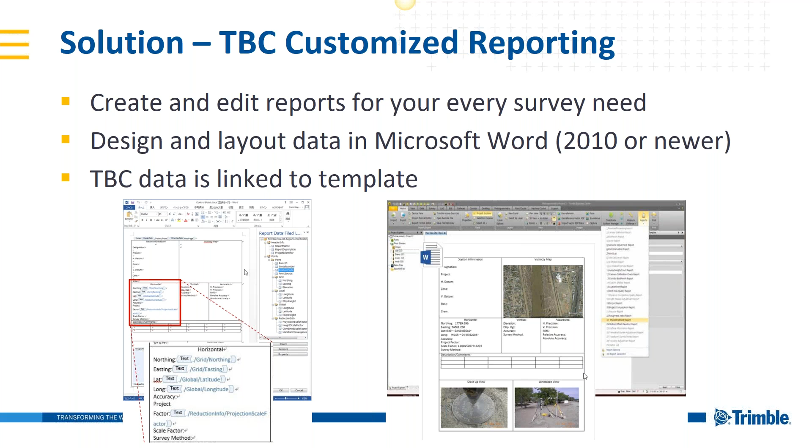It's very few and far between where I can find someone who's never used MS Word. Most schools, elementary and junior high, teach students to use these programs at a young age. So it's important that we can do this feature within a very familiar environment, to bring that ease of use.

So the workflow, I've got an image here, and I messed up the animation unfortunately. But what it's meant to show is you start the workflow: field workflow, you go out and do whatever it is you're doing, whether measuring a stockpile, collecting total station data, whatever it may be, as you normally would.

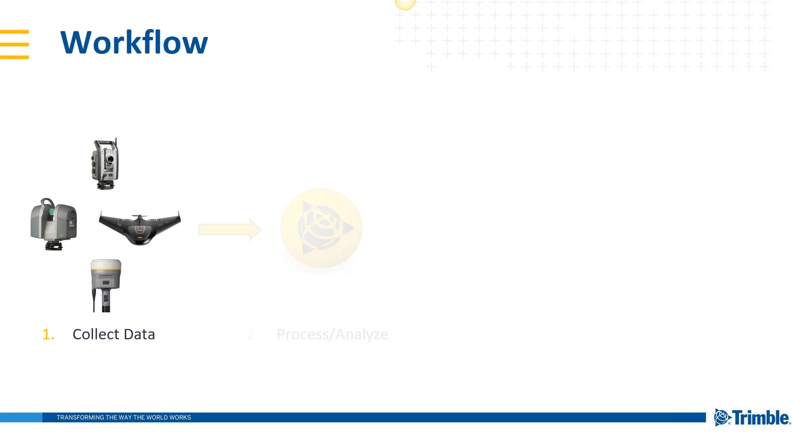You bring it into TBC as you normally would and perform that processing and QA workflow, maybe processing baselines, doing a network adjustment, things like that. Then from there, you use the Microsoft Word add-in to link the data in TBC to a Microsoft Word template document and generate your report. Pretty straightforward workflow, and Adam's going to demonstrate that soon here.

Some of the big benefits come down to the ability to document this data in your own unique way, as well as what your client requirements are. As survey professionals, we're always under what our client requires, and a lot of the time clients may want a report in a specific format. With the customized reporting, you're able to create that format and automate the data from TBC into a template. This also helps with standardization, streamlining the workflow instead of going back to that old way of copying and pasting data from TBC into a Word document just to get a report out. We want to get rid of that tedious process and make it more streamlined.

So, I talked long enough here. I want to relax. I should have brought shorts like Adam so I could hang out here, but I didn't.

That button there is new. For report name, here's where you get a chance to name your report. So I'm going to call this Adam's static baseline report. And then here's where you can add a description.

You can see under report options in case you're curious what this report is, so I'll just say custom report for baselines. And then here's the interesting part of this feature. For report source data, we have baseline processing data, network adjustment data, point list data, as-staked data, and alignment geometry data. What this basically is for our report is we want to be able to access certain types of data.

So for instance, with the baseline processing report source data, we have access to vector information, RMS, whether a vector is fixed or float. In a network adjustment report source data, we have access to error ellipses, standard deviations, and covariances and such like that.

The way I would look at it is, for example, the baseline processing report source data - any data that I see in the baseline processing report right now, I have access to. There's a few things that aren't included in the report, but essentially think of it as like a database for baseline processing. So Adam is linking to baseline processing or whatever it is - yeah, exactly, that's a good point. In a simple way, think of it as: if there's data you want to access in our current baseline processing report, you have access right here in the report data source, and you'll also have access to certain things related to baseline processing that you probably won't see in the baseline processing report.

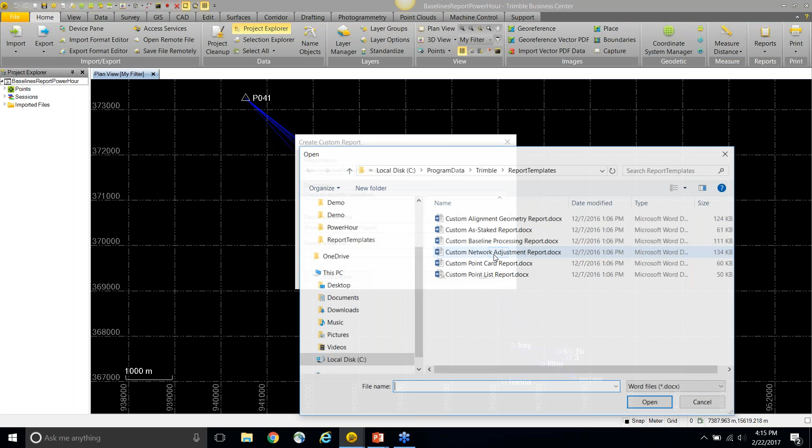So I'm just going to go ahead and click on the baseline processing report because I want to have access to vector information, GNSS information. And then here, my report layout file - this is where we get into the world of Microsoft, where we take advantage of a Word document. Here we have built-in report layouts that come with TBC when you install it, and each of these reports are the exact same reports that you currently see in TBC. But now that we have the custom reporting function, you have the power to grab one of these original templates and customize it to your liking - add things, remove things, and such like that.

Something to note is once you take one of these built-in report layouts and customize it, you're going to have to save it in a different location or give it a different name, because we wouldn't want the end users to tamper with the built-in templates. This was a note given by Jared Black, and I think it's really handy. So if you're going to use these templates, I'd suggest saving it as a different file name, put it in a different location so you can always revert back to these templates if you want to keep editing our current reports.

So if I'm starting out using this command, probably the best thing to do is use one of these reports right off the bat, use one of these custom ones that we provide, and then kind of learn how it looks. I think if you're going to start to get your feet wet with this function, this is the best place to start. Use the built-in custom reports that we already have, and then go ahead and edit it from there.

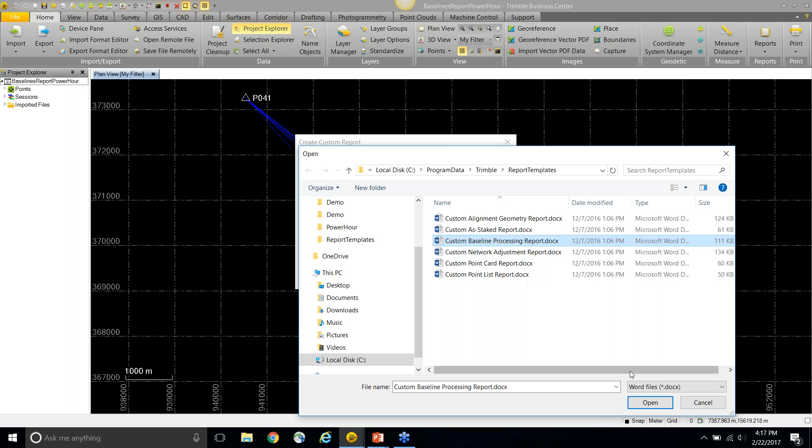What we're going to do here is briefly show how the report looks. We're not really going to get into customization now, we will really soon. So I'll go ahead and hit open, and now I have access to that layout. If I go to edit layout, this is just going to give you a sneak preview of the report. So here is our built-in report that we already have, and on the right you can see we have report source and layout control, and we'll get into more detail on that soon.

So this is just the exact same baseline report that you currently have in Trimble Business Center. What I'm going to do here is go ahead and hit save. And then automatically it's telling me to save as, since it is a built-in report for TBC. So what I'll do is place it under Documents, under the Power Hour folder, and call it Adam's Baseline Report, then hit save. And then your document will be upgraded to the newest file format. That is fine, I'll hit OK.

And there we go, it's a done deal. So I can go ahead and close it or hit OK, and now I am finished. Once I hit OK, my report is now going to be saved into Trimble Business Center, and it'll be saved indefinitely. So for instance, if I open a new TBC project, Adam's static baseline report is going to be available for me to use.

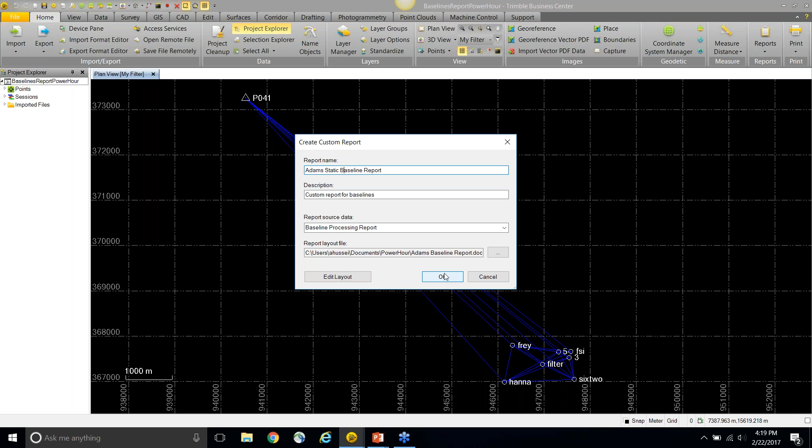I guess the only caveat to that, it's very important to know, as Adam said, if you open up TBC in the future you're still going to have Adam's static baseline report. But if you want to give that to another user, you need to provide that user with a VCT, or what we call a project template in TBC, and Adam can show you where you can save that as well. Exactly. All right, so I'll go ahead and hit OK.

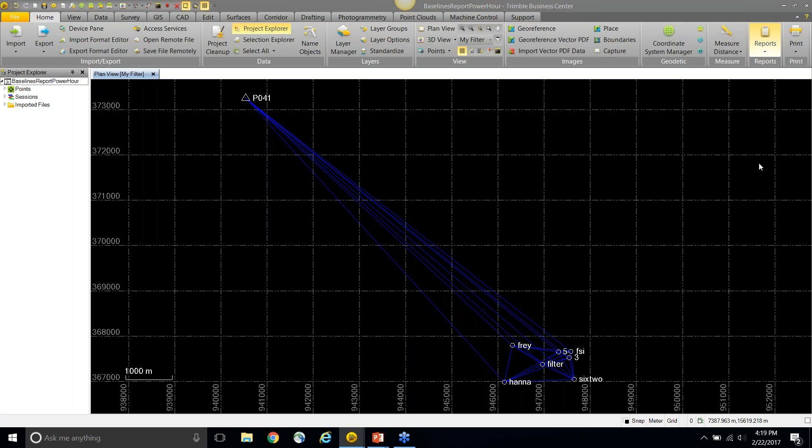All right, cool, and now I'm just going to try to access my report. So what I'll do is go back to the Home ribbon, Reports, and then go to More Reports. And if you look down the list, you'll see Adam's Static Baseline Report. So I'll go ahead and hit OK.

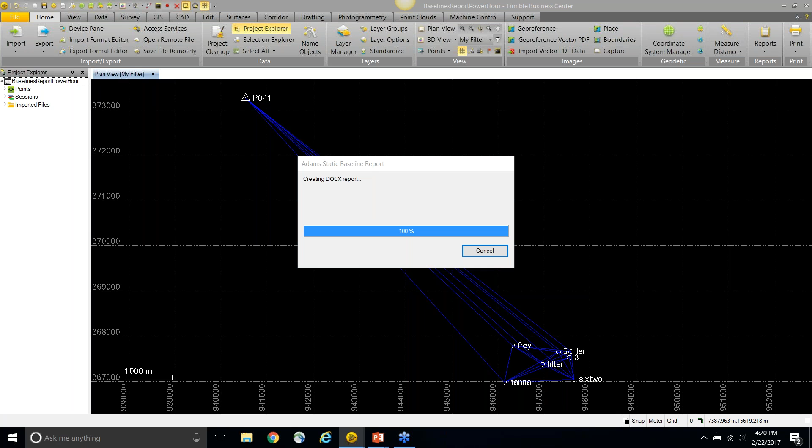And so now it's actually creating the report, right? Yep, it's creating the report, generating it I should say. Yeah, grabbing the vectors. So right now you don't have any data selected in your project? Yes, I do not. So if I wanted to only give a report for, let's say, 2 of those baselines, I would have to select the 2 baselines and then hit create that report again, and it would just show those 2 baselines? Yep, that is very true, and it is the same behavior that you have with our current reports in TBC. So when you select certain data, it's only going to show a report for that data. If nothing is selected, we're going to create a report for all the data that's in your project.

Nice, cool, all right cool. And then now we've got Microsoft Word opening. And here we go.

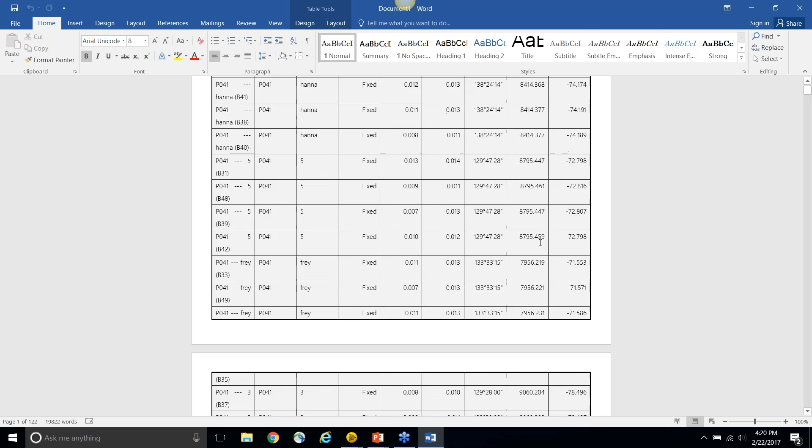And then I thought this was pretty cool. It shows the report name that I gave it, Adams Static Baseline Report. And this is just like our regular baseline report that we currently have in TBC, but now it's in Microsoft Word.

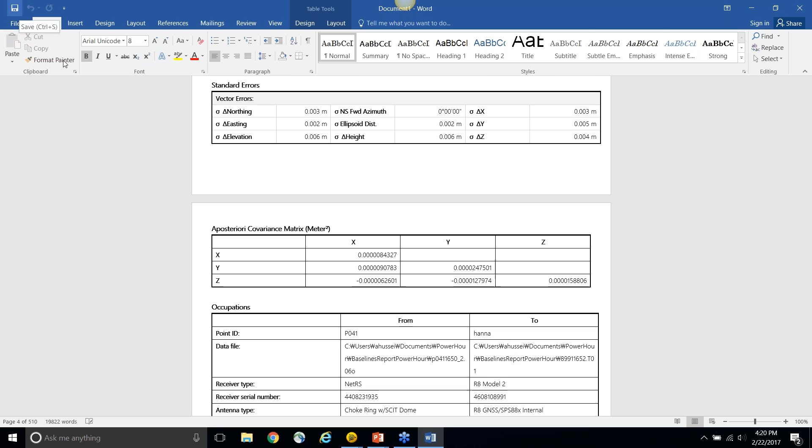Here's where you have the power to save it as a PDF or save it as a Word document, send that to somebody, and so on. At this point you're in the Microsoft world, so take advantage of the tools that are here. There's a very simple way of creating a report.

Notice here I didn't really get into any sort of customization, so let's get into that now. What I want to do is create a report layout from scratch, so I'm going to create a new Word document, set it up, and have my own custom report.

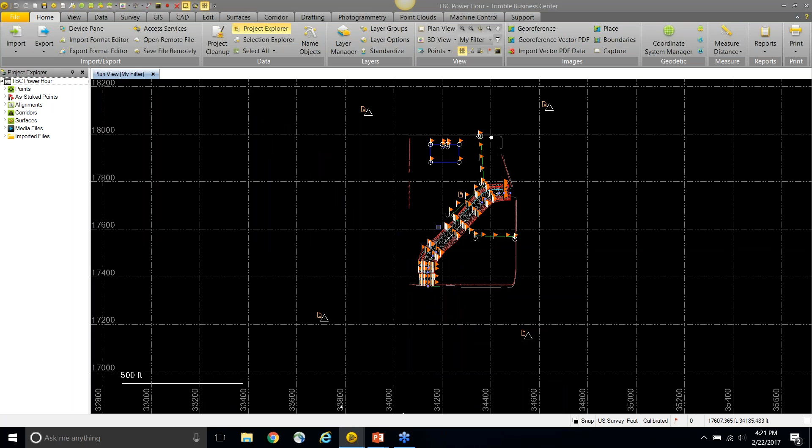I'm going to close this and open another TBC project that I have here. This project is a stakeout of a corridor, and it has stakeout points for building pads, a road, and an alignment. If you recognize this, it's also the same tutorial data set that we have in TBC regarding stakeout data.

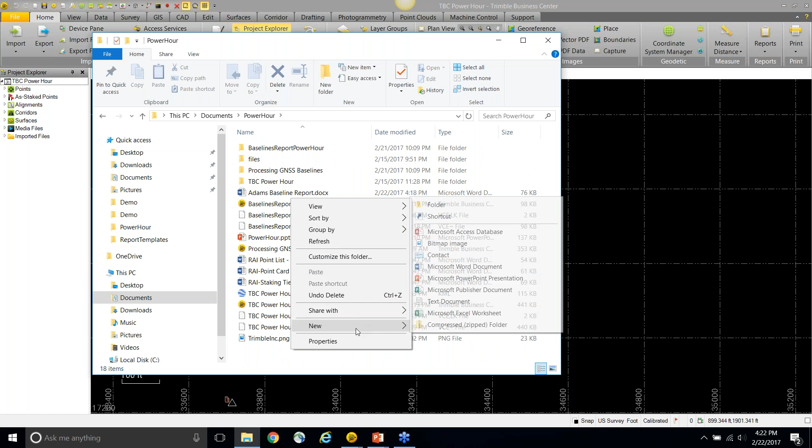So what I'm going to do is get started by creating my own custom layout via Microsoft Word. I'll open Windows Explorer, go to the location where I want to save my custom report layout, hit New, then hit new Word document, and call it Adams Stakeout Report.

So now I have a blank Microsoft Word document, so I'm in the world of Microsoft at this point, and I just want to create a layout for my report.

I want to call this one, I'll give it a title, and I'm going to call it Adams Stakeout Report. I'm going to build this report based on my client's needs, what I usually provide for my clients. So for me, I care about the office user who was using this project in the office, or who was messing around with the data in the office. I'll enter in the field user who is responsible for collecting the data.

When you're creating your layout, you should think about information that you know is in TBC that you want to show in this layout. Now what I'm going to do is insert a table, and I want to be able to see my stakeout points. What I'm interested in is the design name of my stakeout point, the name of my stakeout point, the delta northing, delta easting, and delta elevation.

So I'll go ahead and enter a table right here, and set it up myself — say a design name, stakeout name, and then the delta northing and easting.

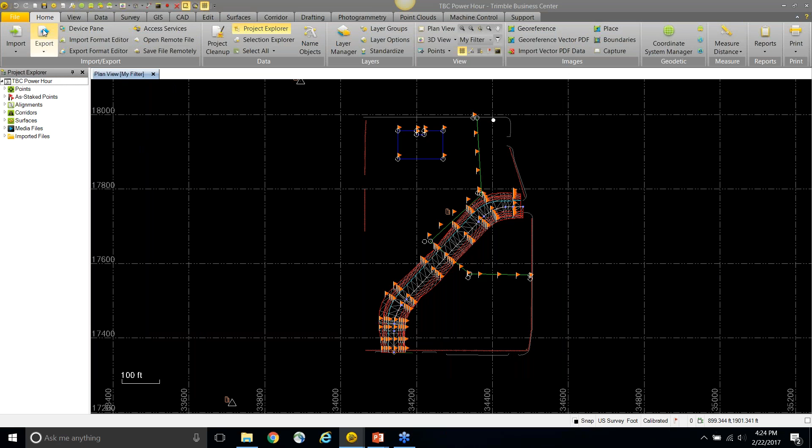Now we're going to do the exact same thing we did before to access custom reports. I'm going to go to Reports, then go to Create Custom Report, and now I'm going to call it Adams Stakeout Report. Then give it a quick description: Custom Stakeout Report Info.

And the data that I want to access is delta northings, delta eastings, the design names, stakeout names. So I wanted to go ahead and go into the As-Staked report.

Hey Adam, I have one question for you. You may have answered this earlier, but if you hit the Report Source Data tab again, there's 6 items there. Is there a reason there's only 6?

Yes, so we have 6 because when initially creating this feature, we wanted to select the 6 that are most popular. These are reports that are mostly used, so we wanted to make sure the end users had access to these types of data sources when creating their reports.

From what I understand, there are plans to add more data sources in the future, so that's something you'd want to keep an eye out for, based on user requirements. So like if a bunch of users want, let's say, a point derivation report, then as a TBC team we might work on implementing that as well.

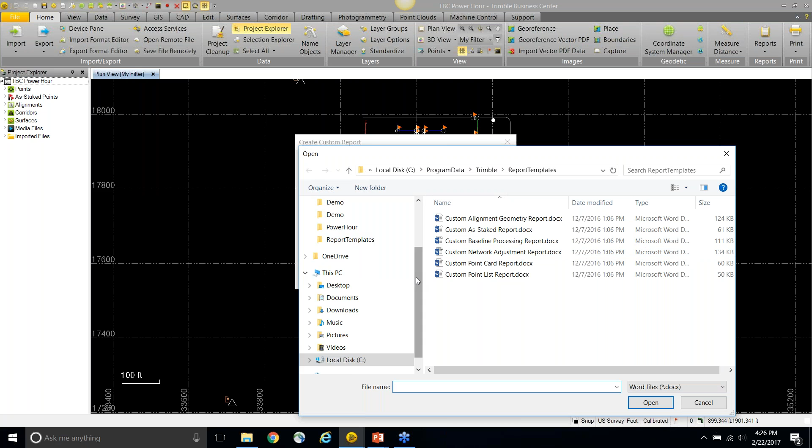Exactly. So go ahead and select As-Staked Report, and then from my report layout file, I'm gonna go ahead and grab the layout that I just created. Under here we are, Adams Stakeout Report, hit open, and now I'm ready to edit my layout and get it set up to create my own custom report.

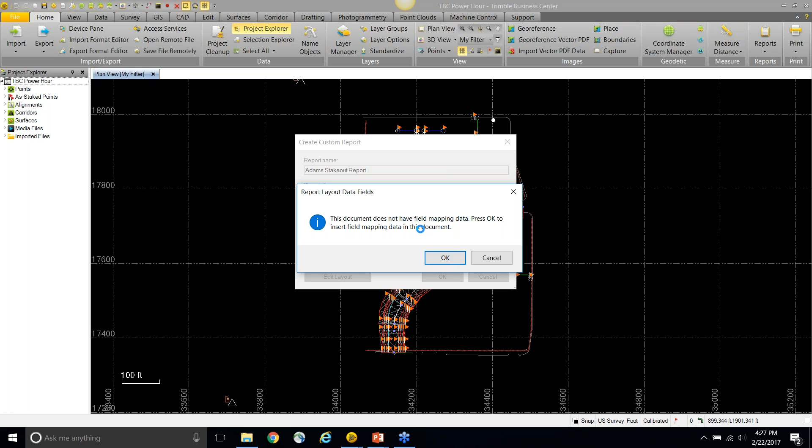And then here it's saying this document does not have field mapping data. Press OK to insert field mapping data in this document. So that basically means there is no data connected to this report. Do you want to do it? I'm gonna go ahead and hit OK.

And here we are, okay awesome. So here is the layout that I just created. And then if you look to the right, we have the data fields, and this is where we access all of the data that we want to put into our report. And on the bottom we have layout control, and here is where it gives us the power to really customize our report in a way to our own liking.

So for office user and field users, remember when I said you have to think about things that are already in Trimble Business Center that you have access to, that you can put on your report. So for office user and field user, that information is available in the project settings of your project. It shows the user information, it shows the field operator, and that's something you can set up in Trimble Business Center.

And here in the report layout data field, I have access to that under standard header info, and then here in user information. And right away I see field operator and computer operator. And what you can do to put that in your report is you would select the data that you want on your report.

You would drag it, and then go ahead and release, and it'll be set up right there. And now you have access to the office user information from the project settings in your Trimble Business Center project. And then you could do the same thing with field operator and place that under field user.

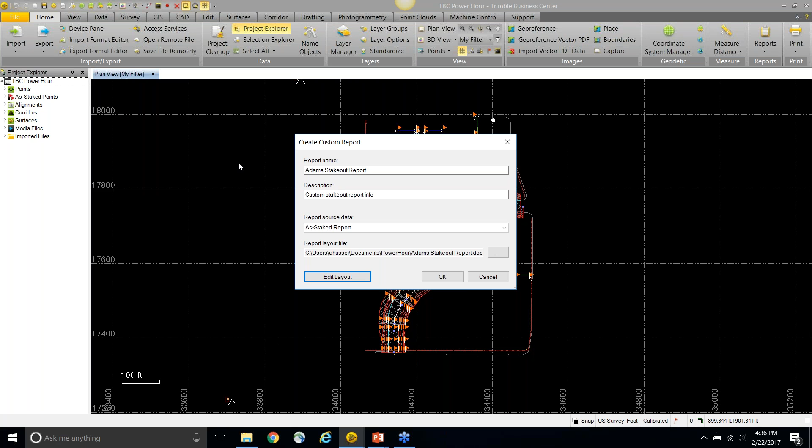I'll go ahead and hit OK, and now I have Adam's Stakeout Report built into Trimble Business Center that I can use repeatedly. And if I create a template, I can share it with other people.

Now I'm just going to go ahead and create my report. I'll go to Home, Reports, and then under More Reports, I'll go down, and I'll have access to Adam's Stakeout Report. Go ahead and hit OK.

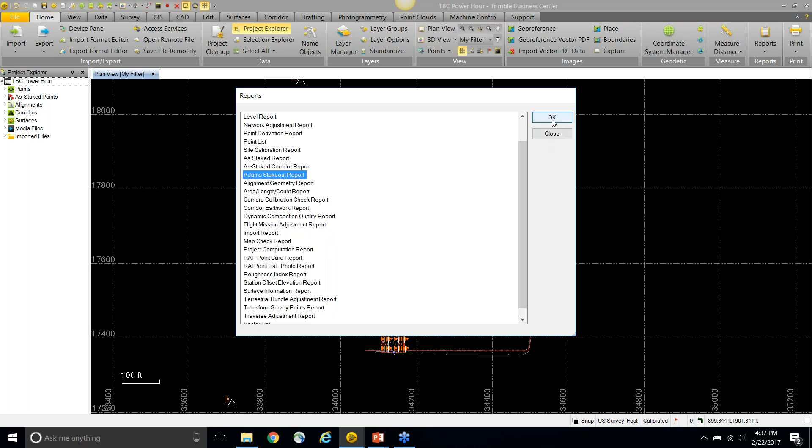All right, and then there it is. There's the report I just made, and it looks like it created my Stakeout Report really nicely. I can see the office user, which is set up in my project settings, field user, and then all my stakeout points that I have here.

And just like the original stakeout report that we have in Trimble Business Center, if a stakeout point is flagged, it'll show it in red in the original report. It also shows that here too in our custom reports as well. So that's like if the project settings had a tolerance set for the stakeout points, it would flag it in the project.

That also flags it here as well? Yes, exactly. It does that in our built-in reports as well, so we're keeping that capability in the custom reports as well. I see, yeah, cool.

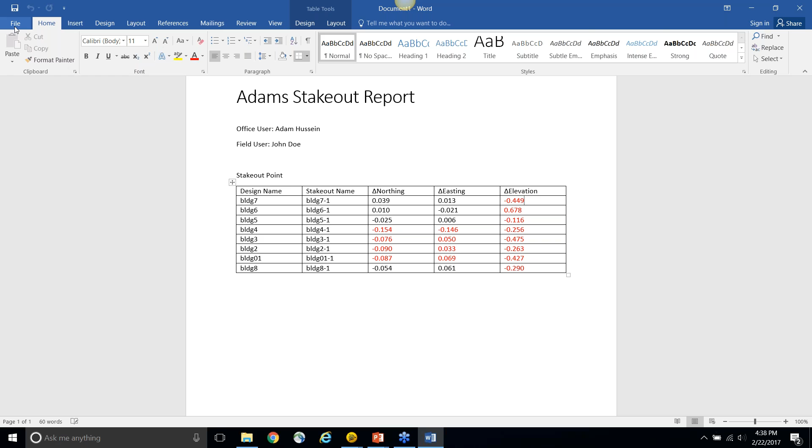At this point, you're in Microsoft Word, so I would recommend saving it. And then you could always save it as a PDF as well, or any other file format.

So there were some good questions asked so far I'd like to address. Holly asked, is there no way to share custom reports with someone who already has a company standard VCE? For those of you who don't know, VCE is the TBC project file format. Whenever you save a TBC project, it saves a .vce file. So in answer to your question, Holly, there is a way.

Essentially what you have to do is take a document like Adam has here, his Adam's Stakeout Report, with that field mapping data already, and if the user who already has a company standard VCT has a template, they can bring the template into TBC and create their report as Adam has done here, where it adds it into the more reports options, and then just save that again as a VCT. Maybe Adam, you can show how a user would save a VCT.

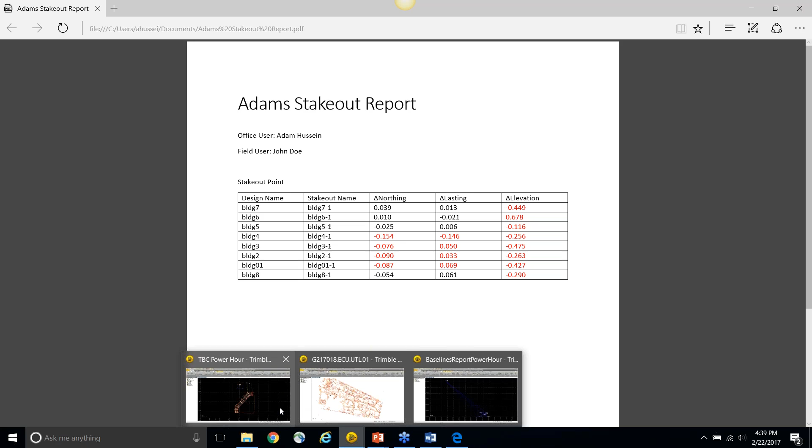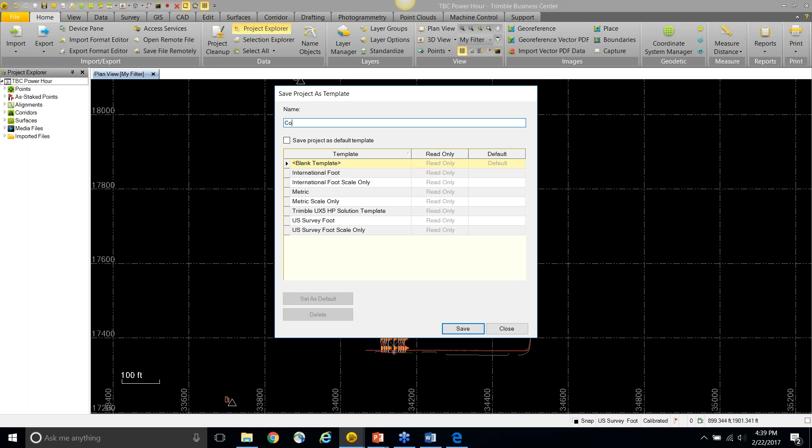So say for instance this is going to be a corridor that our users are going to constantly be working on. There's going to be work on here, so we want to save this as a template. You would just go to File, then Save Project as a Template, and here is where you would set up your VCT. So I'll call it corridor job, and then go ahead and hit save.

All right, so now I have a VCT set up. So anytime I create a new project, we have our built-in templates, which is metric, US survey foot, and now corridor job. So when I use that and create a new project with corridor job, that corridor is always going to be there where we can add in work and take away work.

And that's very useful, like if you have other things you want to set up in your project as well, not just reports, but things like your project settings or your certain tolerances for computations. So the custom reporting does apply to this VCT as well.

So another question, first Holly, let me know if that answered your question. Moving on, Grant asked what version of TBC has the create custom reports included. It was introduced in TBC version 3.80, so any version from that going up. We're currently on version 3.81, so it will be included in that version as well.

As well, that brings up another point. This feature is licensed to TBC Advanced, so if you are looking at using the customized reporting, you can access that through the TBC Advanced edition. If you aren't aware of the TBC editions and modules, I suggest you reach out to your local Trimble distribution partner, and they can definitely help you get into a specific edition or module suited to your types of workflows.

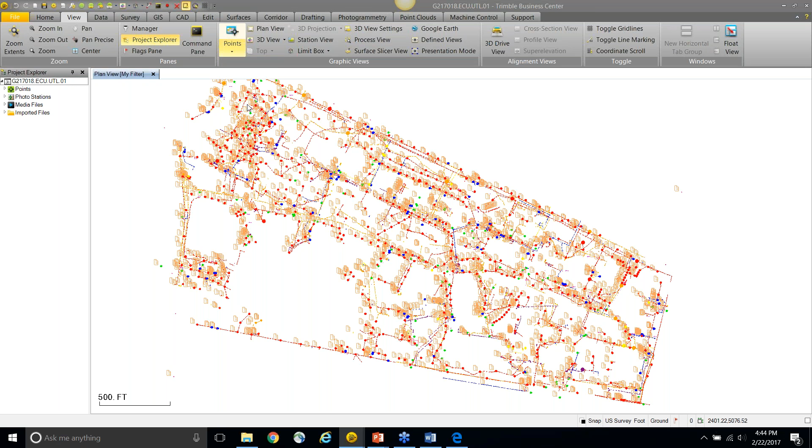And then this function, I think it's a pretty handy function. It helps us separate all of our data based off of the feature that's provided for each observation.

A little more background on this - Jared presented this morning on this, and it was a university site that they surveyed, and they do a lot of asset management. So there's a lot of utilities, a lot of infrastructure data measured here, like Adam's showing you with the feature spreadsheet, things like that.

So let's get more specific and try to tackle something he has here. Say, for instance, I'm interested in power meters. All right, so here is all the info, all of our data for power meters, point IDs, and more. Like we explained before, based on the data you select, you'll be able to create reports from that.

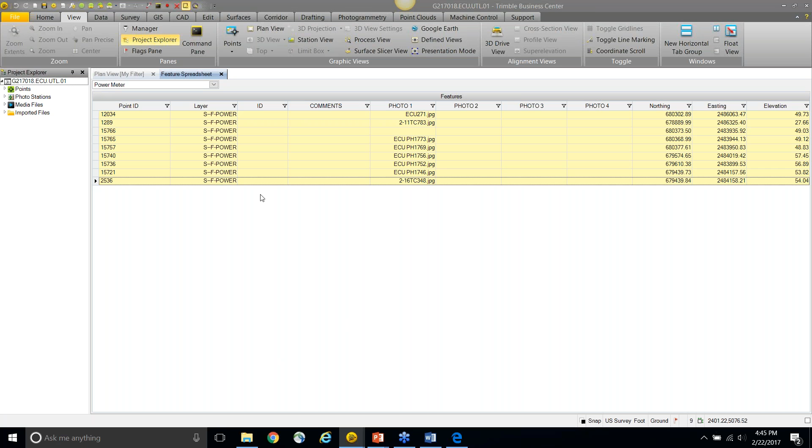So now I'm going to access one of Jared's custom templates that he created himself. I'll go to the Home tab, go to Reports, then More Reports, and go to the RAI Point List Photo Report. This report is just a simple point list report, and he customized it himself to his own liking. So I'll go ahead and hit OK.

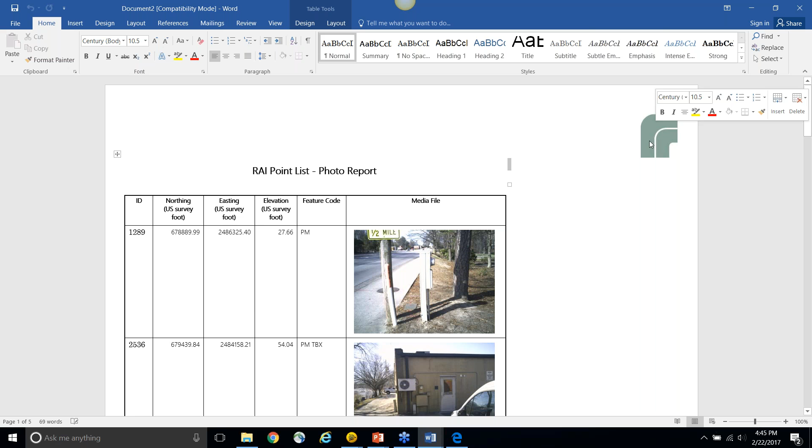And then again, Microsoft Word opens, and here is the report. So there's the logo in the top right here, you can see. And then here, it's a point list report where you have your ID, northing, easting, elevation, feature code.

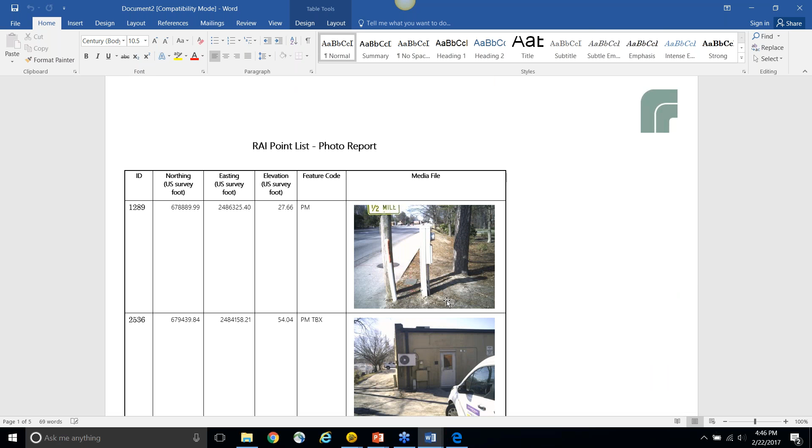What's really handy here, which I think really resonates with our end users, is the media images. This image was taken with a TSC3 or Yuma, where you can take a photo and attach it to your observation. Then we're able to see that media information in TBC, and we have access to the media data in the custom reports. I think this is really handy because everyone loves photos - no one likes to look at numbers all day.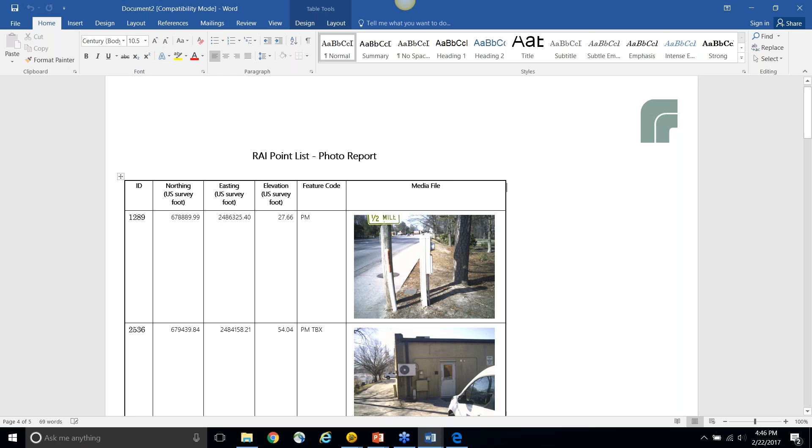Especially for asset management, like if you're cataloging things like power meters, fire hydrants, utilities, a lot of the time the user or client is looking for things like images of that power meter as well as the coordinates. So I think this type of report seems simplistic, but it actually has a lot of weight in the survey industry.

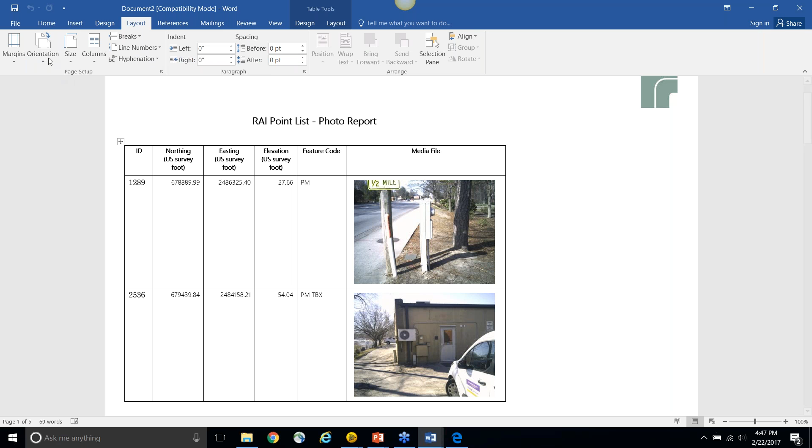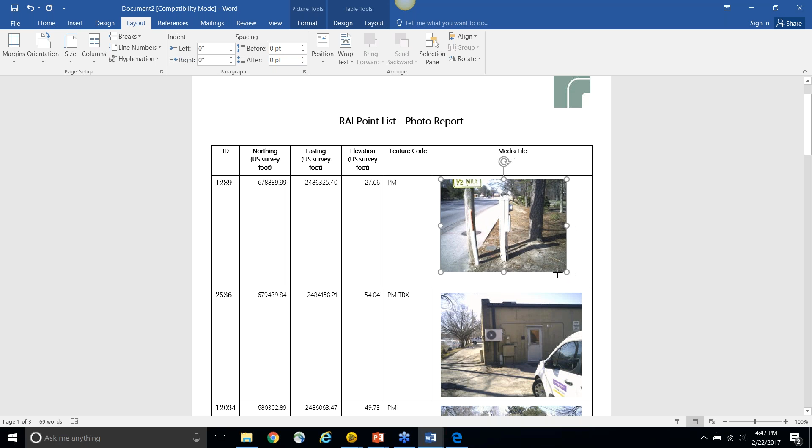And again, at this point you're in the world of Microsoft, so this is where you take advantage of Microsoft tools. Say, for instance, I'm not a fan of landscape, so I want to use portrait instead. So I'll go ahead and use portrait. If there's an image you want to resize, you can resize it right here on the fly, and then edit things to your liking.

Like, say, I want to edit the footer to add page names and page numbers - page number to the left. Oh, there you go, awesome. Most people know how to use it. All right, cool. And then go ahead, and there we go - close header and footer, and there we are. I got my own page numbers set up.

And then, yeah, at this point you're in the world of Microsoft, so you can really edit it to your own liking - save it as a PDF, save it as a Word document, and then send that to your client. So a question that got asked from Alex was, can you repeat the header?

I'm not sure exactly I follow the question there, Alex. If you're looking for us to show how we did that, or if you're asking can we repeat the header within Microsoft Word - in both cases, just like Adam showed, it's exactly like you would inside of Microsoft Word. You would access the design, the layout, create a header, and drag and drop your logo inside that header, and you can choose whether you have that only on one page or multiple pages within the report. So it's the same formatting that you have in Microsoft Word - if you're new to Microsoft Word, you can always go online.

There are more than enough YouTube videos, as well as good forums that Microsoft has, for learning the different formatting and layout options within Word.

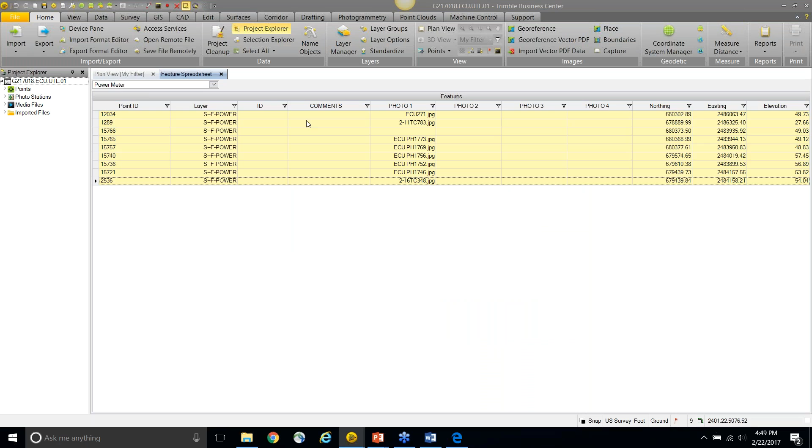I'll go here, and if I hit the drop-down menu, I have all of the custom reports I've created that are saved into Trimble Business Center. I'll go ahead and select the RAI point card report, then hit Edit Layout. This is just editing an existing custom report — exactly, you can go in and edit it. Here you can see it's already been set up with data sources, and everything's already set up right here.

But say you want to resize the media file, or add a new row, or add a new column — you can go in there and edit the custom reports that are already there.

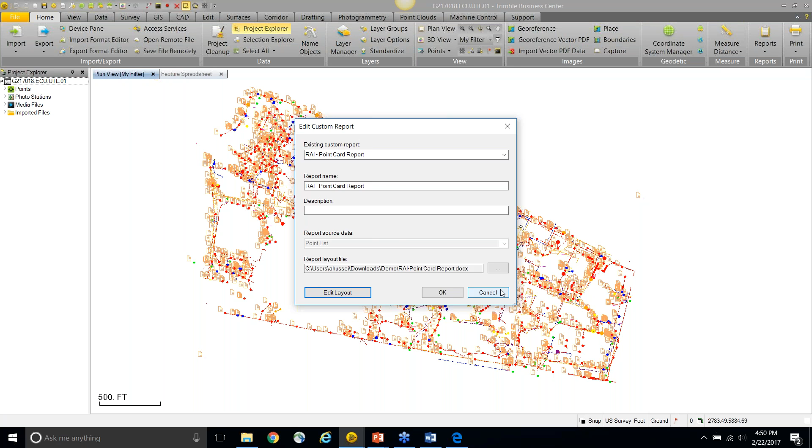This actually looks like a cool report, maybe you can generate it and show. Yeah, for sure. I think Jared uses these point card reports a lot when he's doing monuments or survey control reports, because it can create a table or page for each control point, with media files and all the coordinate geodetic information associated with it.

Let's go back into the feature spreadsheet and look at it via, I think it was monuments he used. Monuments — oh yeah, there you go. There we are. And then we have our photos right here.

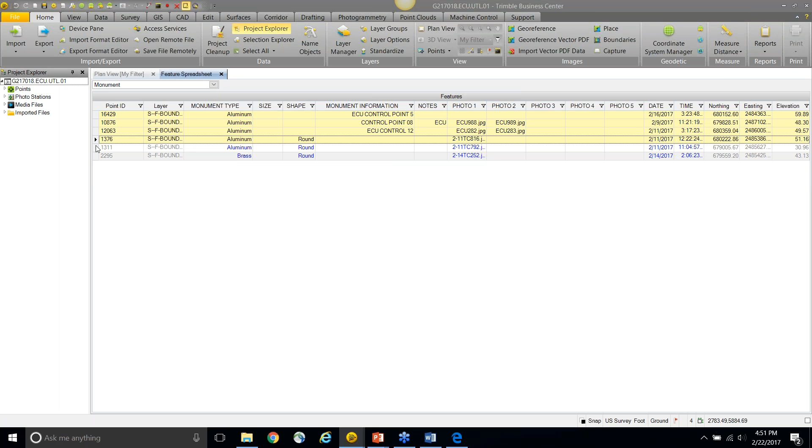So what we'll do is select that data, go to Reports, then More Reports, and do RAI point card report. Hit OK. Microsoft Word opens again, and here we are. So here you have information on each monument that he measured, and a photo for each monument measured as well.

This is a great example of how you can separate your data per table versus per row, and it shows a lot of information here. Nice, cool, right on. Yeah, it's pretty handy.

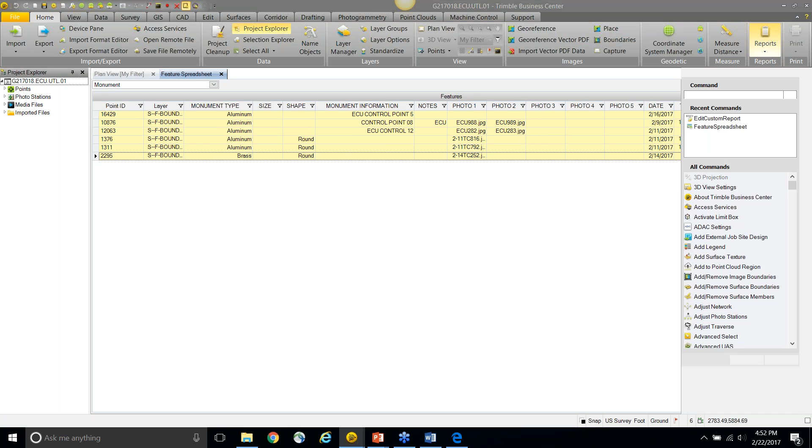Some small things to go over — we did add some small functions here and there. So if we go to Report Options, here we also have the list of all of our custom reports. For the RAI point card, you have the option to create a custom report on the fly, modify the selected report, edit the custom report, and all those options.

I noticed the settings are grayed out there. The settings are grayed out because they were built for the built-in functions we have. If I select point list, you can see all the built-in options for our point list report. For the custom report, there's no need for these settings because you can go in and edit it yourself — exactly, so it's set up right there.

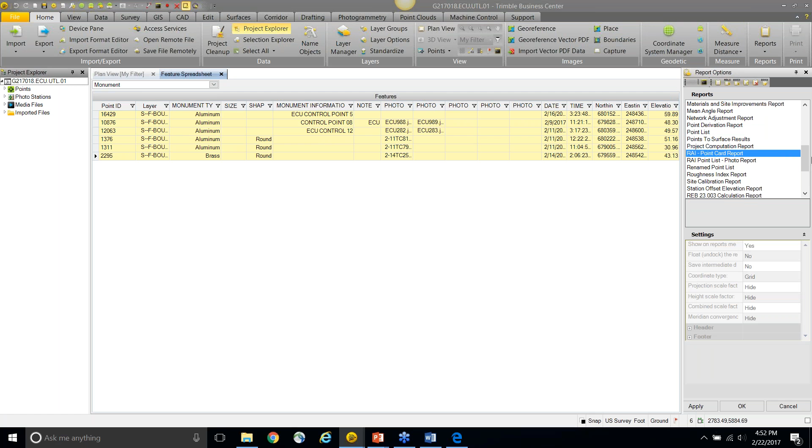And that's pretty much it, everyone — that is custom reporting in a nutshell. I guess we can go over some more questions and see what else we have. Let's maybe answer a couple questions before we sum it up.

Let's see, Adam, you see any good ones there? Are customized level reports available? Customized reports.

So I know we got a custom importer for leveling data. Yeah, there is no customized leveling report currently in TBC. As Adam showed earlier, we currently have 5 types of databases you can map from: the network adjustment, the baseline processing, point list, as-staked report, and the alignment geometry.

But if the leveling report is definitely something you're interested in being able to customize, please put your enthusiasm in the chat window there, and we'll look into getting that implemented. That was kind of the whole idea behind only having a few reports at the start of this implementation - we wanted to get out the most important reports to the majority of our users, and then as we get more feedback from end customers on what reports are important to them to customize, we can start adding more into future TBC releases. So leveling can definitely be something we add in the future.